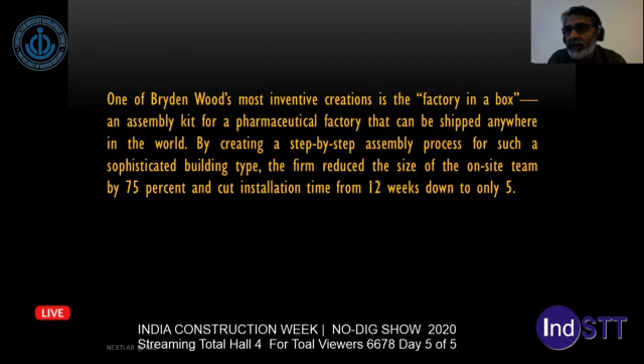Bryden Wood, one of UK's famous architects, created an inventive factory in a box, an assembly kit for a pharmaceutical factory, a complex one, by creating a step by step assembly process. The firm reduced the size of labor at the site by about 75% and the time consumed for construction by about 50%. So what we're trying to say is every company today has to think like a technology company and then look at the different verticals it seeks to disrupt.

So what is an intelligent building system and how can we apply that to a practical real case? This is what Next Lab at Bay explores in this particular presentation.

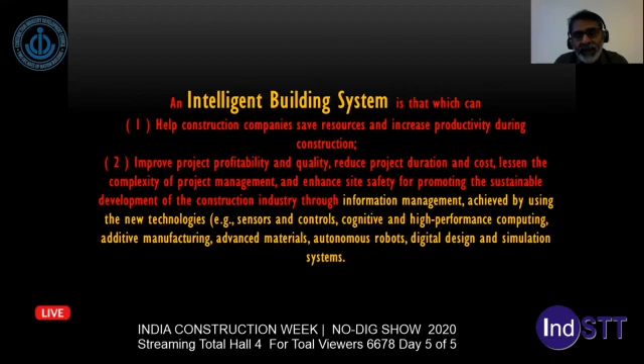An intelligent building system, by definition, is one that helps construction companies save resources, increase productivity, and improve project profitability, quality, and reduce project duration and cost, reduce the complexity of project management, and enhance overall site safety for promoting sustainable development.

Next Lab at Bay looks at IBS, or Intelligent Building System, from a multi-pronged perspective. The first one is to create a strategic view based on a forecast digital-driven value chain transformation or disruption.

The second is an operational view as to how to decompose the strategic view into a pattern that can be applied across verticals. A technology view, in which case we assess the different technologies that are available and how the frameworks of technology and networking make it possible for us to convert the operational view through the technology into an intelligent building system, and a transformation measurement view that lays the objective basis for measuring the transformation quotient.

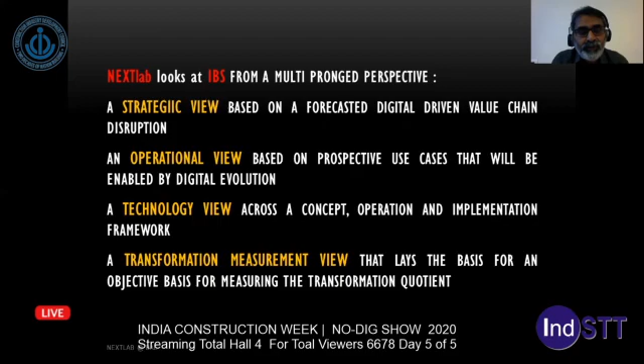Let's see the different views. First, we take a look at the strategic view.

Let's take a look at the value chain of a conventional or evolved value chain pattern in our industry. From raw materials to renovation to demolition, back to raw materials, across manufacturing, design, engineering, construction, and operations. There are several stakeholders currently, with new stakeholders coming into the mix through different types of innovation. So this is how an evolved value chain currently, as most of us know it, exists.

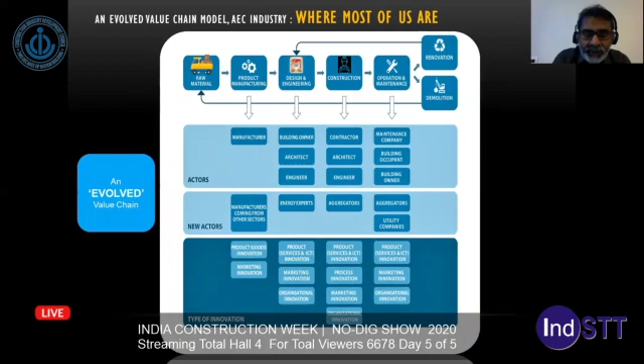Now, each link in this value chain is set to undergo drastic reformation based on digital disruptions. Let's take a look at raw materials, the basic building blocks, which from conventional cement, sand, aggregate, reinforcement, bricks, blocks, etc., go through industrialization to become prefabricated RCC components like columns and beams, prefabricated homes, bath pods, pre-engineered building systems, factory in a box, which you've already seen, and thereafter, through industrialization, Industry 4.0 or digitalization, become converted to smart construction objects and intelligent building systems, and reformed or innovative materials like 3D printing solutions.

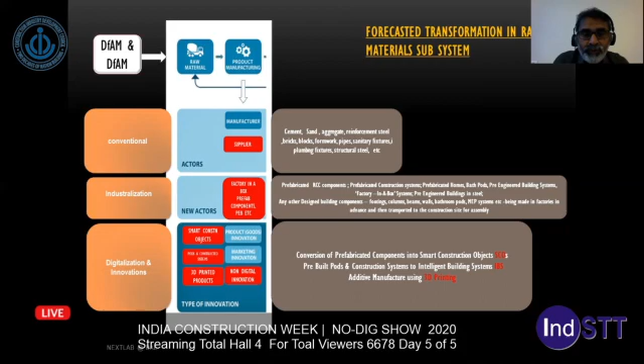So this is how the raw materials link in the value chain has transformed or will be transforming due to digital disruption. With almost all the verticals getting consumed by Industry 4.0 or the digital revolution, sooner or later, this is where we are headed.

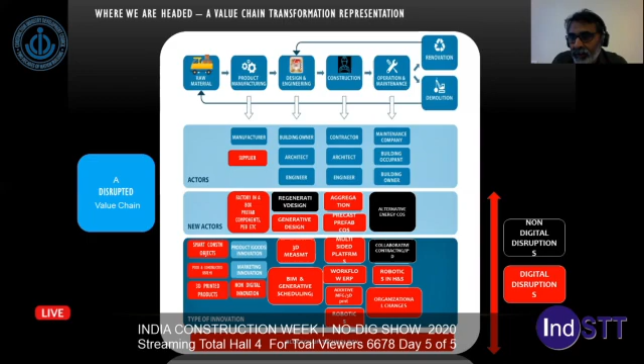The value chain transformation in our industry would look something like this, where you can see the areas highlighted in red are the different technologies that are going to disrupt the different links in the value chain.

And therefore, we are in the near future headed to an AEC 4.0 location like this, where we have prefabrication, modular construction that will be rampant, advanced building materials, 3D printing, additive manufacturing, autonomous construction, augmented and virtual reality, big data, predictive analytics, wireless monitoring, cloud and real-time collaboration, 3D scanning and photogrammetry, and building information modeling. So these are some of the technologies which will drive the use cases for the digital transformation of Industry 4.0 in our industry.

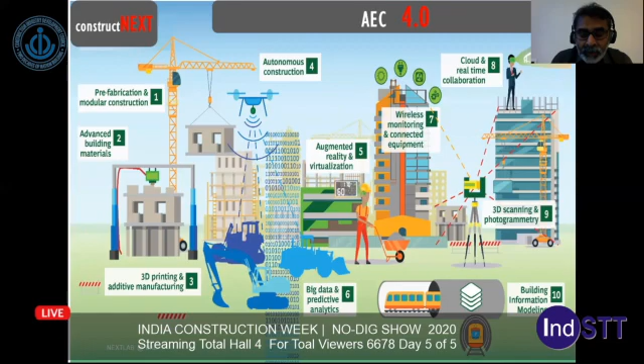Everything that you saw in the previous slide is a thing as defined in the Internet of Things.

Let's take a look at the operational view based on a forecasted suite of use cases. IBS is a product of an end-to-end digital transformation initiative across a company's or an industry's standard operating process. A company often asks the question: what needs to be or can be digitally transformed?

For example, a suite of activities in a typical post-contract repository would look like this, across construction documentation or setup, procurement, construction management, inspection, testing and protocol reviews, reports, etc. These have got several activities or tasks associated in a post-contract ecosystem.

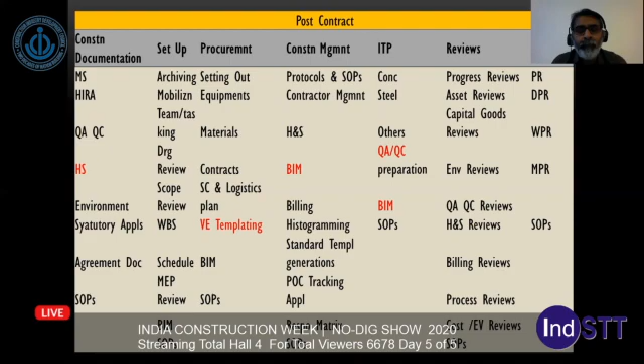The IPS's operating view examines a suite of activities, which we've shown before, and identifies an aligned suite of technology and other solutions to aid the transformation of each activity or operation, establishing a collective automated operational protocol for it. That is the operating view.

As a simple example, let's look at the combination of building information modeling and IoT, which creates a digital twin on a BIM platform. NextLab is a multi-sided platform, and we work with aggregated digital expertise in the quest of a converged whole. Virtual Win is one of our associates in the realm of building information modeling.

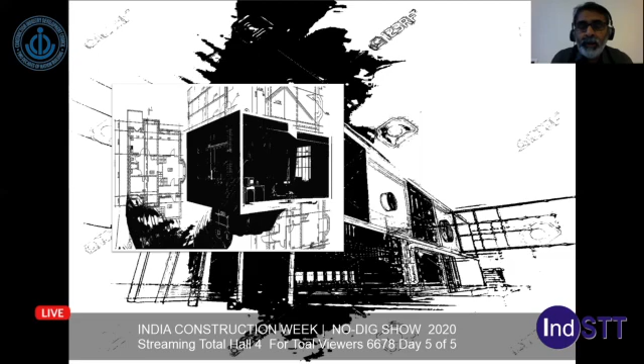Let's take a look at how BIM is transforming the industry. It's not a disruption anymore because it already exists, but combined with IoT, which is a serious disruption, BIM creates a digital twin and makes it possible for us to plan and schedule using the platform.

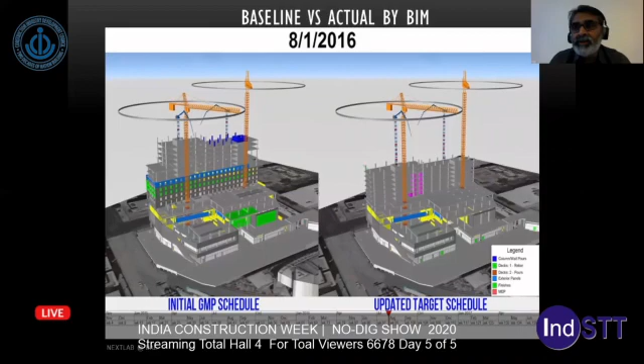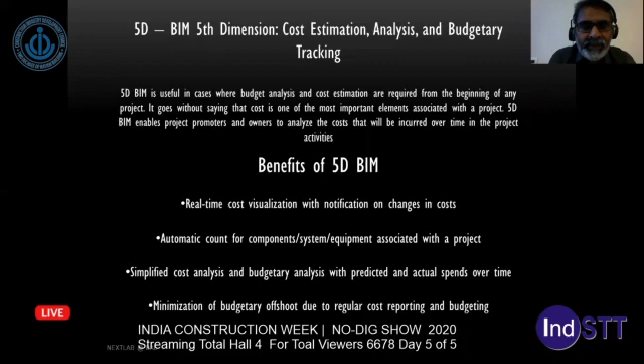This creates a baseline versus actual scenario in real-time monitoring of the project. It creates a cost estimation analysis and asset management schedule with its 5D capabilities. The sixth dimension of BIM makes it possible to create energy analytics to aid sustainable energy consumption.

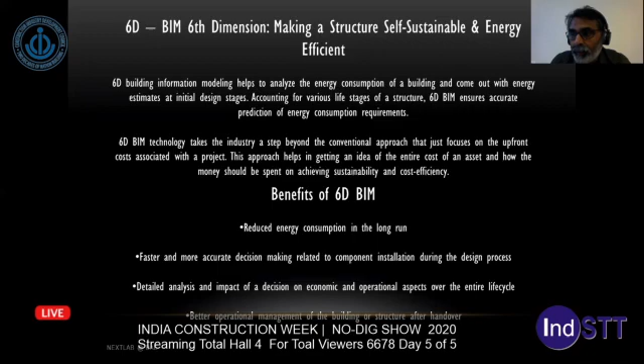7D is probably one of the most important aspects of BIM in terms of contributing to the operational and facility management well-being of the structure after construction is over, by having a complete set of data retrieved from the construction site as it happens through IoT technology and sensors, transmitting the data back to the BIM platform and creating a digital twin in the process.

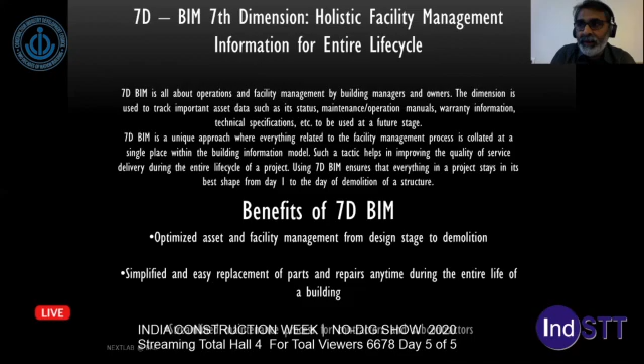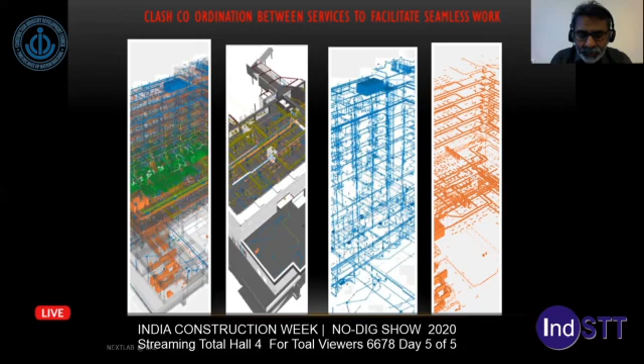It also helps us achieve clash coordination between the services, which is a very important part in ensuring easy project management and construction supervision.

Further, we also do research on specific trends occurring all over the world and specifically to our country, and identify practical use cases across the technology spectrum.

In IBS, it's required that we engage in a suite of digital technologies. Based on those technologies, we collect data which we acquire, store, visualize, and analyze to create a rationale for engineering outputs of products, which is the ultimate objective of using digital technology for the betterment of our industry.

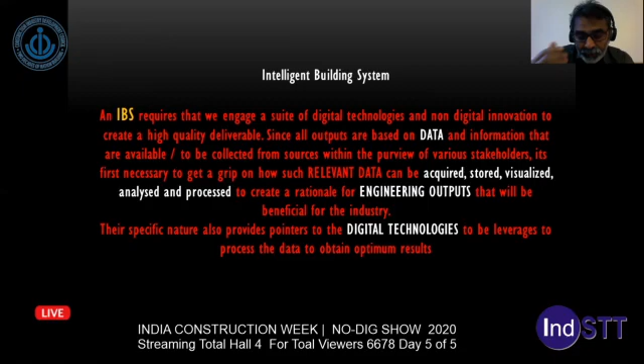So let's take a look at this combination of technologies that are available and the different use cases with which it integrates over a network to create rampant changes or disruptions. The rate of change is far removed from what used to happen in the past. It's not linear anymore, it's exponential.

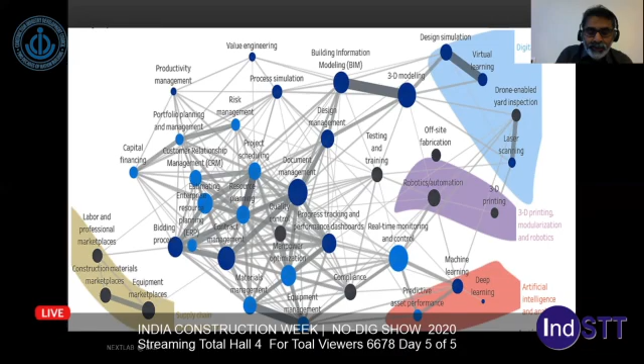A mix or complex web of use cases and technologies are shown here, which means investors are looking to make investments in technologies such as ERPs and other serious digital disruptors, particularly predictive analytics, big data, IoT, and drones.

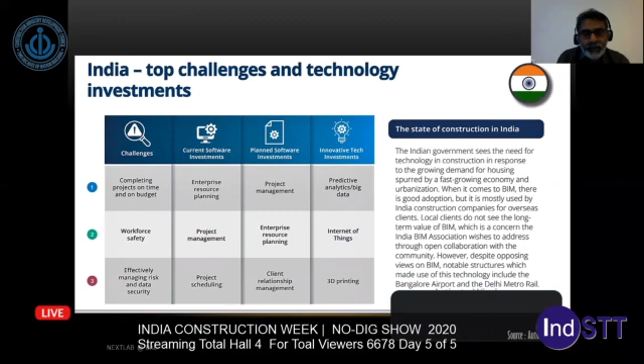As far as India is concerned, given its special nature of challenges, software investments are currently hinging around ERPs and project management and scheduling software. However, the time is not very far when we combine all the other technologies also to create platforms, a converged whole platform using a combination of technologies, to deliver optimum quality outputs or deliverables to the industry.

Let's take a look at the technology view, how this technology is employed in different frameworks. There are three different frameworks that we are creating, which I'll talk to you about. Firstly, we develop a conceptual framework of the intelligent building system.

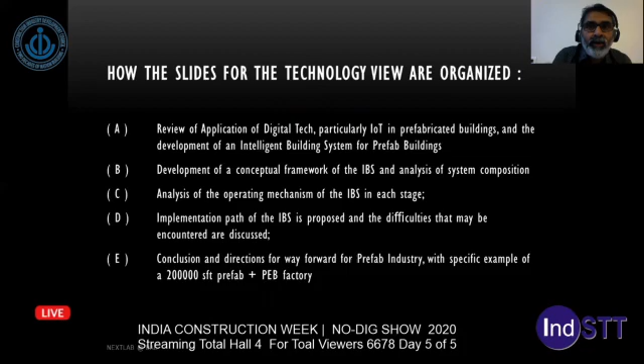Then we analyze the operating mechanism of the IBS. Then we look at the implementation path of the IBS. In all of this, we take a technology view and not the strategic or operational view of the platform itself.

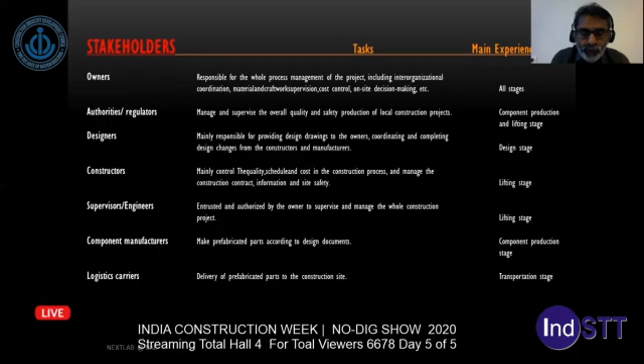First, looking at the stakeholders, we have the owners, the regulators, designers, constructors and contractors, engineers, component manufacturers, and logistics carriers, each with a specific set of responsibilities and each within a particular zone of experiencing the changes due to the transformation. So what digital technologies are to be employed?

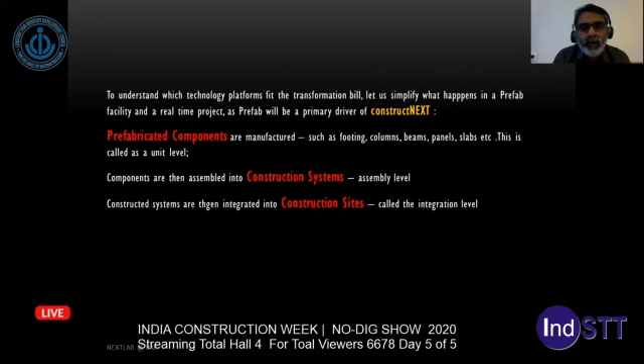To understand this better, we have to divide the prefabricated building, which is the use case we are taking, into three different levels: a unit level, assembly level, and the integration level, which is a component level or construction system level and the construction site level, respectively.

At the prefabricated component level, we identify, locate, and track prefabricated components through the connectivity of IoT to realize visualization and traceability of the component information.

At the system level, or construction system level, again in the factory environment, we plan and optimize the construction process through real-time collection, integration, and interaction of the construction production process.

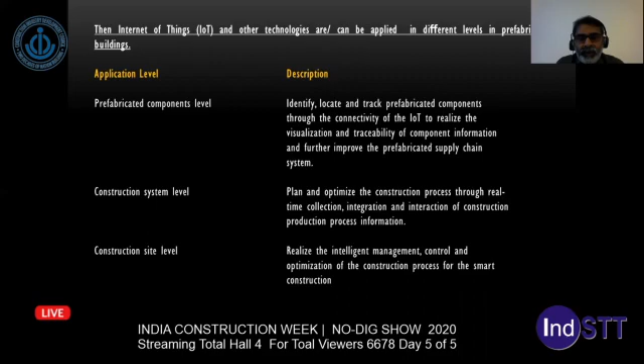And at the site level, where the components and the construction systems are assembled, we realize intelligent management, control, and optimization of the construction process for smart construction.

At the level of the components, we use IoT, RFID, and GPS to achieve our objectives. At the construction system level, you use a combination of IoT and a BIM platform to interchange and transact the data and information. And at a construction site level, we use the technologies of internet, 3D scanning, BIM, virtual reality, augmented reality, and IoT.

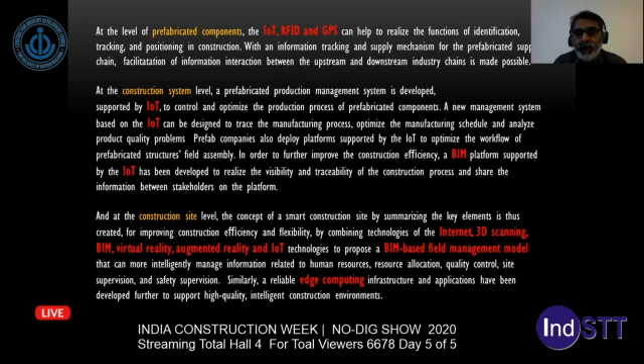And to propose a BIM-based field management model that can intelligently manage information related to HR, resource allocation, QA, QC, site supervision, health and safety, etc.

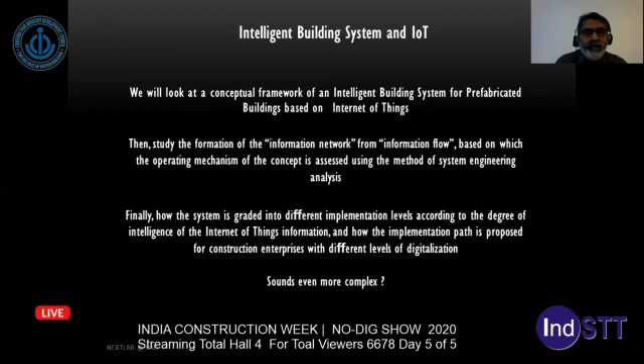So we've seen these are the different technologies like IoT, GPS, RFID, BIM platform, internet, 3D scanning, etc. These are at the core of a prefab digitalization. We will look at the three frameworks that we talked about.

For looking at the framework in detail, as data is king in almost all things digital, we have to create different sources or blocks of data, which will then over a network flow information across to and from, and be responsible for creating the interpretation and thereafter creating of the product that we're after.

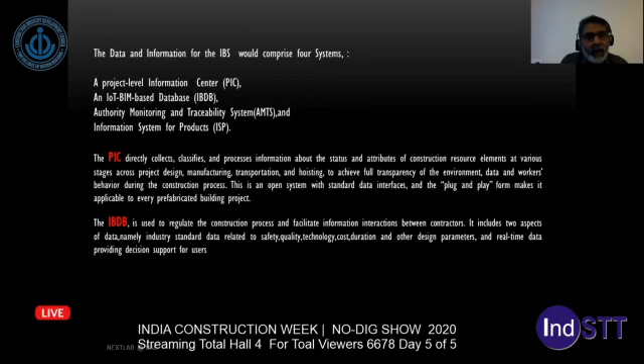So there are four primary blocks when it comes to a prefabricated building. You have a block PIC, which is a project level information block, IBDB, which is the IoT BIM-based database block. Then we have an AMTS, which is the authority regulatory block.

And we have an ISP, which is a system for the construction of digital engineering products, which is a combination of all the, which takes cognizance of all the data and information, analyzes, acquires, interprets, visualizes, and creates the products that we are after.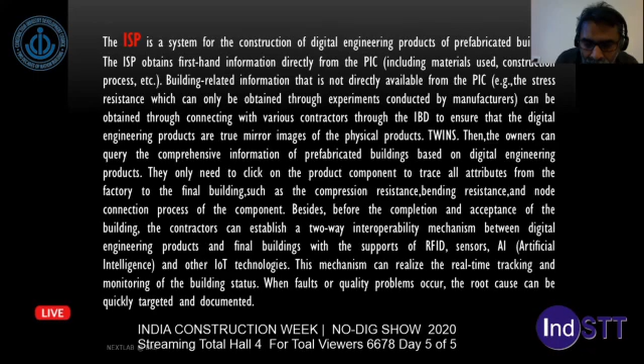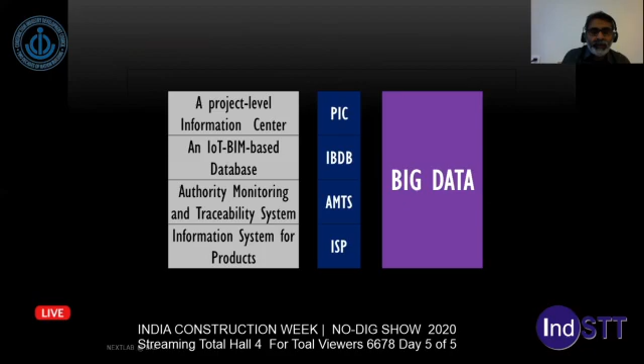So to sum up, the big data acquisition is the function of these four blocks: PIC, IBDB, AMTS, and ISP. A project level information center, IoT-based, BIM-based database, authority monitoring and traceability system, and information system for products.

This also integrates further with several systems and subsystems of the manufacturers, the designers, the contractors, logistics operators, etc. So each of these contractors, if you want to call them that, would have their own systems and subsystems.

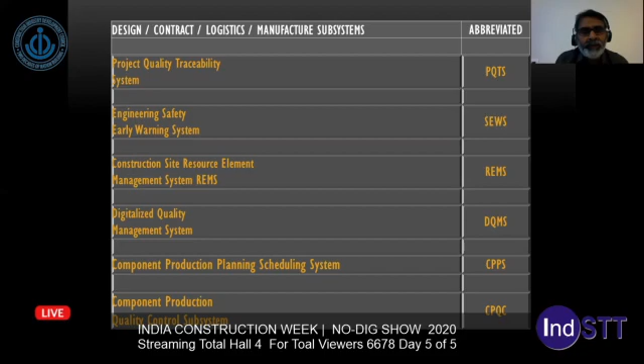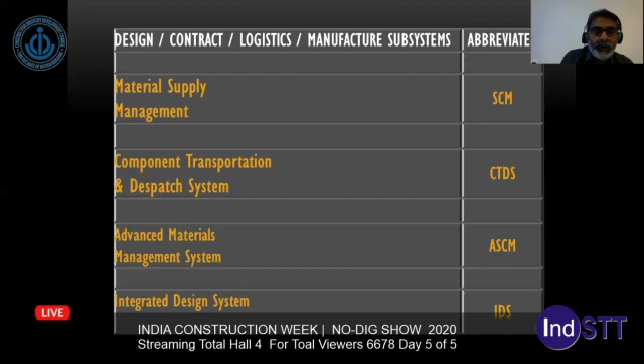Like the project quality traceability system of a manufacturer, or a construction site resource element management system of a contractor, or a component production planning scheduling system in the prefabricating factory, or a component transportation and dispatch system, CTDS, of a logistics operator, or an integrated design system, IDS, of a design consultant.

So with all these different blocks of data, combining with the blocks of data of the manufacturers and their subsystems, we create a conceptual view where we highlight the main objectives of the authorities, the contractors, and the owners, which are supervision and control, lean construction, maximizing benefits, quality traceability, etc.

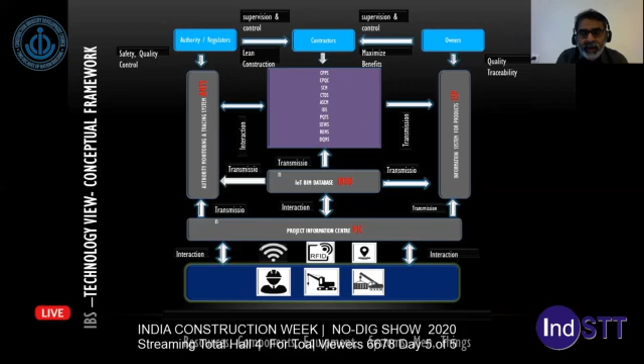How they combine with the subsystems of the manufacturers, interact, transact information between those systems and subsystems, and through the network of RFIDs and Wi-Fi's and Bluetooth and what have you, interacts with the construction site to deliver a solution across resources, components, equipment, systems, men, and things. So this is a conceptual framework which leads us to an IBS technology view operating framework.

In this particular slide, you can see three different distinct frameworks. One is a design framework that is highlighted in dotted red lines, and the other is the component production or the manufacturing framework, and then you also can see the on-site construction framework.

So what happens is, through the design process, where you create a design model, analyze it, and once it clears the clash detection, data that is construction oriented is transferred onto the on-site construction.

Data that is manufacturing oriented is sent across to the manufacturing facility, and this data is then checked, analyzed for quality in terms of clash clearance and design conflicts, etc.

It's only upon the clearance of, because the data keeps interacting with each other at the construction site, at the manufacturing facility, and at the component level, at the system level, etc.

When it comes to the construction site, then any errors or any mismatch between what has been created and what needs to be implemented at the site is recorded, and if there is a design conflict, it's sent back to the design, back in the loop to create a new design model, and then the final refined component, construction system, and the construction site is thereafter created and finished.

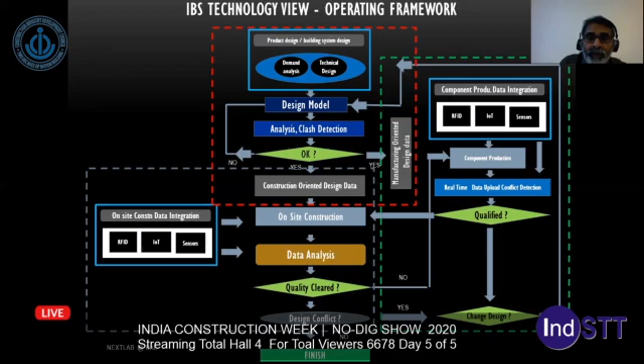So this is the technology view, the operating framework of the technology view. And how do we implement this concept and the operating framework?

It is done through a simple 10-step process where we build the smart construction objects. As we've seen earlier, the construction objects that are created from the prefabricated components, we build them first, establish a data acquisition system, collect data from SCOs through the data acquisition system, establish a network integration system, connect these SCOs through the integration system, establish an information integration system.

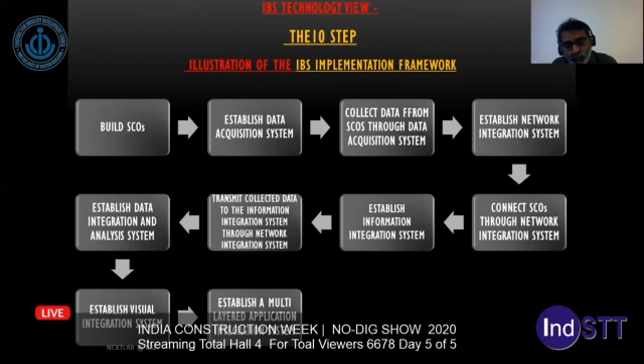The data information is created from the data, transmitted to the information integration system, and establishes a data integration and analysis system. We analyze through a visual integration system and establish a multi-layered application integration system, resulting in the creation of your application of the product through the ISP.

So that's the technology view. We've taken the operating view earlier, and we've looked at the strategic overall wide canvas view, which brings us to the transformation measurement view for IBS.

We have used information and research from various big five consultancies like BCG, McKinsey Global, and we're inspired by the balanced scorecard approach to strategy implementation by Kaplan and Norton.

Although we are a work in progress for creating the digital transformation value chain transformation scorecard, BCG has set out a paradigm requirement for creating this digital transformation: an integrated strategy with a clear transformation goal, leadership committed to the goals, deploying high caliber talent, agile governance system, effective monitoring by lining out milestones, and a business-led modular technology. This is one approach from BCG.

Similarly, we look at other big five consultants as well, and we can see how we go about creating a value chain transformation scorecard, which is the implementation measurement of the IBS strategy for a prefabricated building.

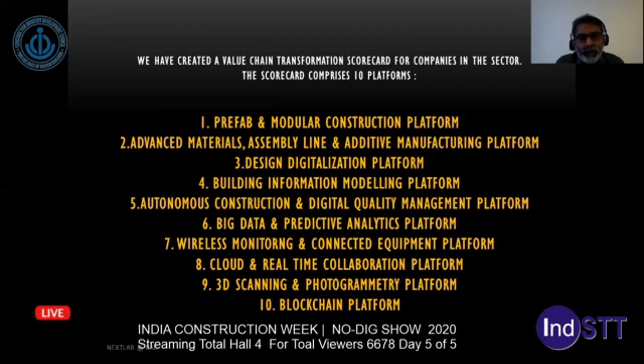The same can be done across different types of buildings. So what are the different 10 platforms? We look at a prefab modular construction platform, advanced materials platform, design digitalization platform, BIM platform, autonomous construction platform, big data platform, wireless monitoring platform, cloud and real-time collaboration platform, 3D scanning, and a blockchain platform.

At Next Lab, we are an MSP, a multi-sided platform where we bring all the digital talents together. We have established for the value chain transformation clear KPIs and objectives across the different value functions in a company or a vertical, and then identify the different measures, the lag measures or outcome measures, and the performance drivers necessary to create the digital transformation across these different platforms, which can be measured for the efficacy of implementation.

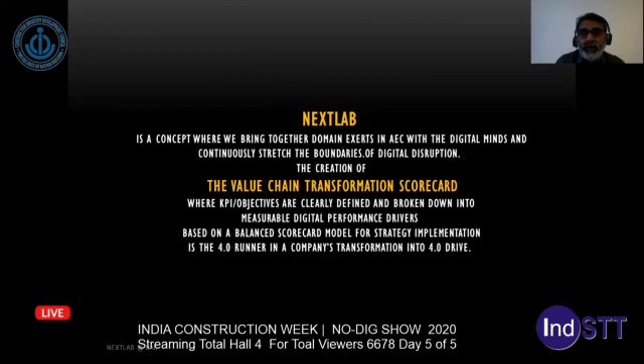So a few of the scorecard templates we can show here. We have not gone into the details of the outcome measures, performance measures, and actual status, etc., because these are all specific to the nuances of the way the company operates.

So if you see in the prefab or modular construction platform, there are clearly mentioned objectives which lead to the KPIs, such as production optimization and quality control. All these measures created here will be a function of these objectives and the use cases we mentioned earlier.

By defining the different use cases across the different departments in the company, in a post-contract environment, you've got the construction management part, the setting up part, or the mobilization part, etc. So defining the key objectives, and I've given a description of some of these objectives also.

Defining the measures here, and what needs to be the outcome measure, and to achieve that outcome measure, what needs to be a performance driver to ensure that we get production optimization by creating these systems, most importantly using technologies like IoT, RFID, GPS, BIM, etc.

So the different technologies necessary to be employed for us to implement these systems, by which we can make a paradigm change in the way companies and their different departments operate. Here is a scorecard, a kind of template for a prefab and modular construction platform.

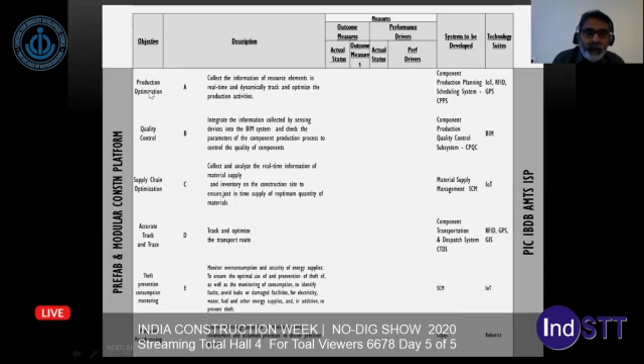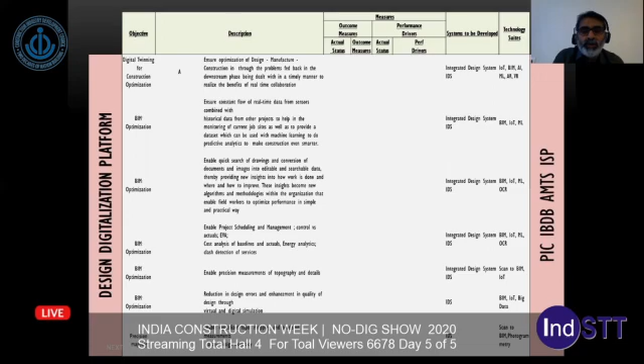We've shown you the design digitalization platform here. This is different from a BIM platform because BIM is a completely different area in itself. So these are some of the scorecards or KPIs for the design digitalization and autonomous construction platform.

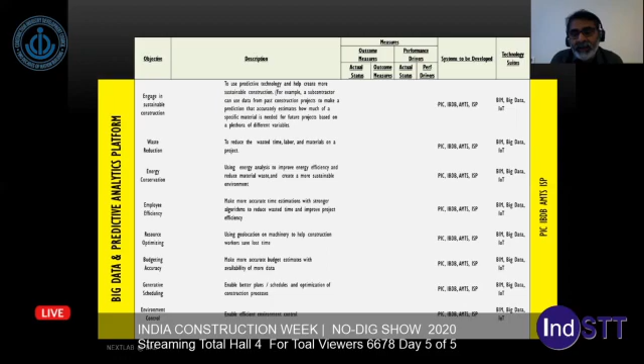Again, the technologies in play here are also illustrated in this big data, predictive analytics platform, etc. So for digital transformation, we are currently doing a project in South India, which is a 2 lakh square feet project for a German principal.

They manufacture generators for windmills, and the digital transformation approach using these different views -- the operating view, the strategic view, the technology view, and this particular digital transformation measurement view -- is being implemented. It's a work in progress.

And this is being done using a 10-step IBS framework and a 10 platform IBS strategy.